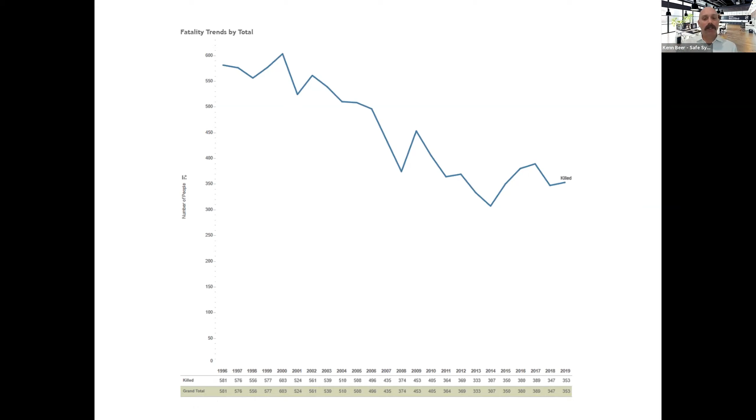So there's just a graph representing fatality trends in New South Wales since 1996. There's a general downward trend, which is pleasing to see, though it starts to flatten out a little in the later years. The numbers range from around 300 up to 600, sitting around 350-ish, dipping down there. But it's still a pretty big number. You have a large population, but these numbers are quite large.

Serious injuries are often something that people don't have front of mind when thinking about road safety. Fatalities get the headlines and are reported, but serious injuries are often the ones that last a lifetime, lifelong care, acquired brain injuries, quadriplegia, paraplegia - quite a spectrum of what can be in the serious injuries. The serious injury definition is really about admission to hospital, so that means you can have some lesser severity injuries where people recover, maybe with some physiotherapy, and are able to lead a normal, healthy life. But there are quite some very serious incidents within this.

There are categorizations of serious injury, so you can go into more detail, and the Centre for Road Safety does that sort of work to gather understanding. But the magnitude we're talking here is 4,000, 5,000, 6,000, up to 5,500 - huge numbers of serious injury, which sort of bubbles away under the surface of those fatalities. That is a major health crisis really going on in New South Wales. It's a challenge because it's been ticking away for all of our lives, really.

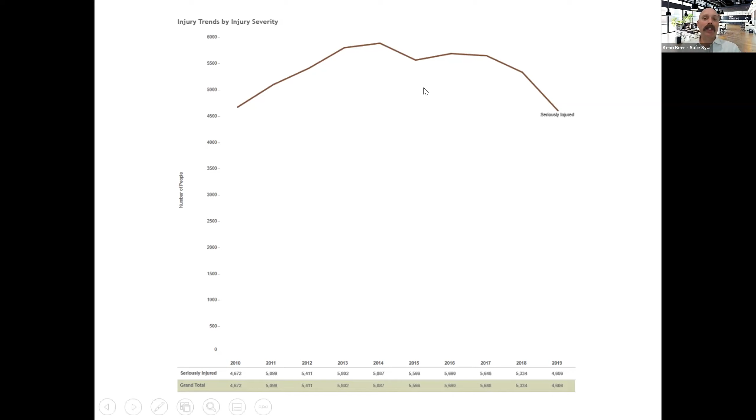And the fatalities and serious injuries just keep happening, run of the mill. So getting huge traction to change that can be very challenging. But there is a good bit of work going on. Now you see the serious injury trend starting to come down, which is very promising, and we hope to continue that downward trend.

If you break things up by metropolitan, country, or regional - I'm using exact terminology that came out of a Transport for New South Wales report - you can have a look here, we're doing fatal and serious injury combined, and we've got the crash types.

You see there off path or out of control on straight, we've got the regional, country, and metro a little bit less. Off path or out of control on curve is the largest there in country areas and the largest of any of these bars. Then we've got pedestrians, metropolitan area obviously a large segment there, and not as many in country areas, but still certainly there.

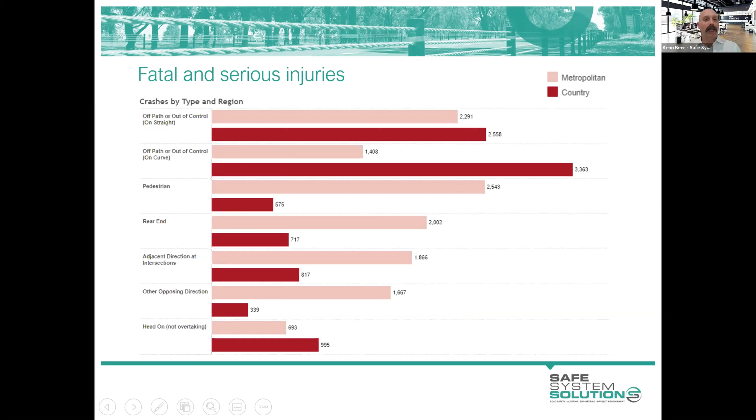Rear ends coming in, again metro more than country areas. Then we've got some intersections, and again metro areas are producing more crashes there, more fatal serious injury crashes, as you might expect. Other opposing directions, another intersection category. And then we've got head-on, not overtaking - so there's not an intentional overtaking maneuver in the head-on, but the head-on crash has occurred. So that's the overall trend in fatal and serious injury crashes.

If I use the fatals as an indicator of severity - so yes we had serious injuries and fatalities, but the most serious and damaging being the fatalities - this is probably a good indicator also of your highest levels of serious injuries. You see that country New South Wales or regional New South Wales starts to pop out as a dominant area of this.

Now there are a number of factors that mean we see country pop out very high in these categories. What would that be? The first person to put probably the most dominant factor into the Q&A can win a prize. So Wade has jumped in there very quickly with speed, and speed is absolutely the dominant factor in terms of the severity of crashes.

Now there are many other factors, and I noticed fatigue popped in there as one. So certainly, yes, people are having long distances and they're getting tired and leaving the road, and those are causal factors, absolutely. The speed creates the severity of these crashes, and why we see the fatal end popping out higher, and the higher level serious injuries as well.

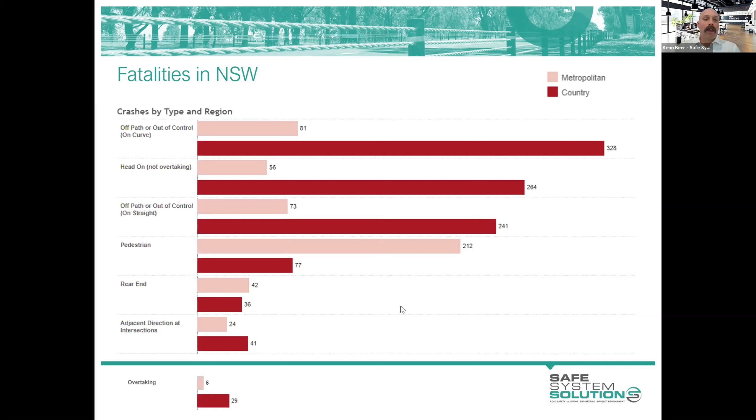If we look there, and I just grabbed a few others, you see it starts to really kick up with the USA at about double in terms of per head of population. The US will always argue that it should be measured by vehicle kilometers traveled because they travel more than anybody else, they say. But even when you cut it down by that, they don't perform that well either.

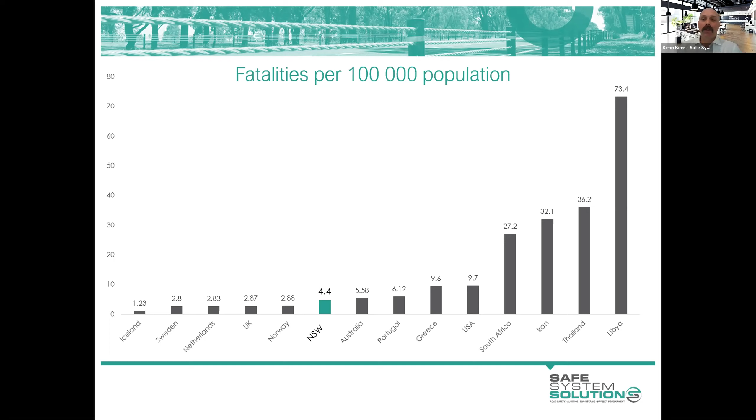And it'll happen again next year, and the year after, and the year after, and it'll just continue to roll. It's a huge, huge issue, and we've got to look for ways that we can address this, as we've been doing.

But certainly in New South Wales, one of the biggest and most violent and most severe crash types you're seeing on your roads and roadsides is where vehicles leave the road and hit point source hazards, be that a tree or a power pole. Now these crashes are happening at speeds that are unsurvivable for the occupants of the vehicles, even in the best vehicles available to us.

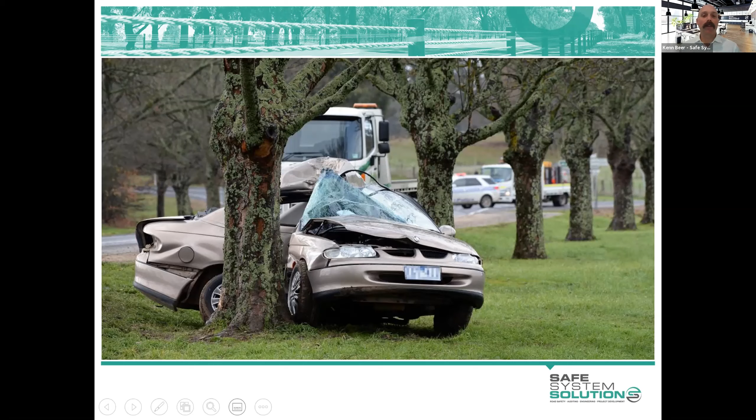The energy transferred to the occupants of the vehicle when they strike power poles or trees - you cannot survive that. Your body is not designed to survive that, and the vehicle is not strong enough or not designed well enough to protect you at those speeds.

Even head-on crashes, while they are often less severe at more speed - you can crash at higher speeds because of the crumple zones, the airbags, the seat belts - in that frontal impact, we still see quite a large amount of death and serious injury from head-on crashes.

Now that picture might be a little misleading in terms of it looking very front to front. We often see quite an offset in these crashes, which actually makes it even more severe if you're only hitting half of the vehicle you're head-on crashing with.

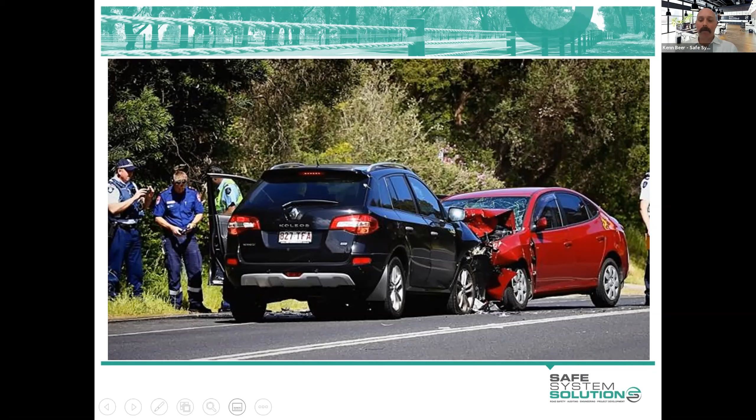Interestingly, we do also see quite a number of especially serious injuries with lane departure rollover crashes. They have maybe struck something small in the roadside, or maybe been yawing, which is where a vehicle starts to slide. They've maybe tried to get back on the road and slid to the side, their tires have collected some dirt and pushed the dirt around, and they've started to roll.

This is not as severe as that point source tree or power pole strike or the head-on, but we certainly do see quite a bit of spinal injury associated with these rollover style crashes. So we've got these cleared areas on the roadside, yet we're still seeing serious injuries occurring. Admittedly, there are quite a few people who will leave their lane into a roadside, and if it's cleared, will recover and not be involved in an incident. We need to factor these sorts of things into how we manage and design roadsides, and Jamie's going to delve into that in a lot more detail.

Even things like cuttings - in the past we used to think of a cutting as almost like a barrier in its own right and ignore it. But we do see vehicles snagging on cuttings, vehicles riding up them and rolling. Again, we see serious injury and sometimes death presenting itself from cuts. And of course, fill batters, the slope, and the ability to roll and draw you into other hazards is something of big concern.

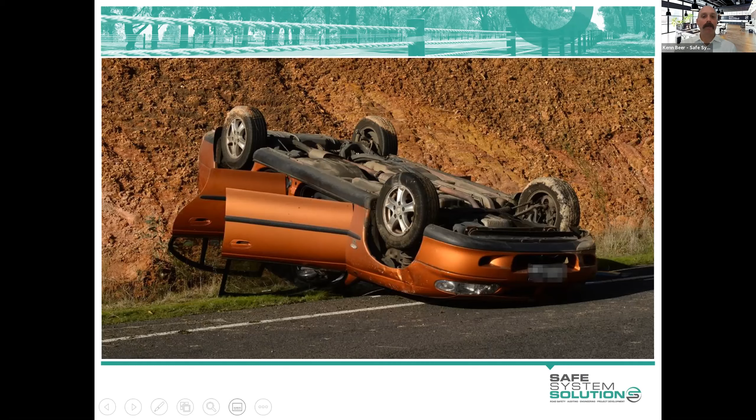Now, the New South Wales government is trying to address this through a number of mechanisms, and there's a Road Safety Plan 2021, and no coincidence really that there's a barrier on that plan, because barriers are going to make up a huge component of the effort to reduce road trauma in New South Wales. Barriers of different forms put in different places will do that. And the reason is that they align very well with the SAFE system, which I'll come back to shortly.

There's a couple of key documents, and Jamie's going to take you through these. Austroads has recently released the Guide to Road Design Part 6, Roadside Design, Safety and Barriers - that's the updated version, it came out very recently. So those who have been operating under older versions and have their way of operating pretty well set, because it hasn't changed that much in quite a long time - there's been some pretty big changes, and Jamie's going to give you insights into those.

We also have the Manual for Assessing Safety Hardware, or MASH, which is the AASHTO document - an American document - but that is about the test protocol for barriers. So what do barriers need to be, how do you test them, and which ones do you accept in terms of passing these tests? That manual is a very comprehensive document telling you exactly how they need to be tested, what weight of vehicle, speeds, angles, what sort of results you need to get, how you need to set the whole thing up, and all of that.

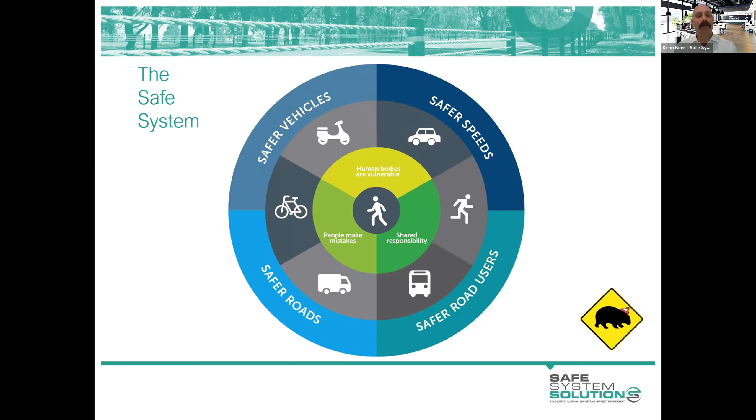But the real takeaway is that barriers are proving to be an amazing road safety infrastructure feature. They align highly with the safe system, which the New South Wales government has committed to and is implementing. There's a huge amount of money being pumped into barrier rollout, and we need to get it right. So this course is really about setting you the fundamentals of making sure we get the most out of every dollar spent on barriers in terms of lives saved and serious injuries prevented, giving you that base level understanding.

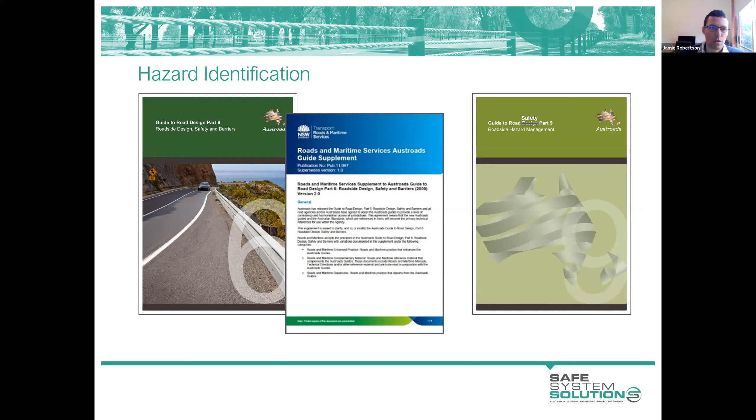There's also the Guide to Road Safety Part 9 around roadside hazard management. Now that's quite an outdated document dating back to 2007 or 8, but it is a useful resource when it comes to looking at hazards in the roadside.

So the updated guide really has changed things up a bit when it comes to assessing hazards, and it's hopefully making it easier for practitioners and a little less subjective than was previously the case. It's grouped hazards into a few different categories. The most significant of those hazards fall into the significant hazards category.

Now, hazards are grouped based on what's referred to as a trauma index. These are the ones with the highest trauma indices, and they have a trauma index basically equivalent to that of striking a tree in the roadside. So significant hazards include trees and other fixed objects that are rigid and will bring a vehicle to an abrupt stop, utility poles, of course, signal poles, rigid lighting poles and the like.

It gives some criteria around batters, which are sort of typically subjective to assess in terms of their risk. So some guidance around fill batter heights and slopes, and also for cut batters. Watercourses of a sufficient depth to submerge a vehicle and therefore create a drowning risk as well. Drainage structures appear in the significant hazards list. So these are the worst hazards that we encounter on our roadsides.

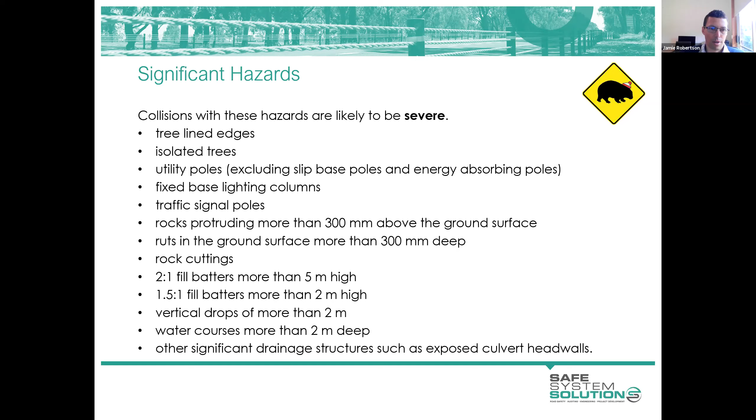There's the number one killer on our roadsides, trees, and it's particularly the case that we see these fatal and serious outcomes where there's a side-on impact at speeds as little as 30 to 40 k's per hour, as Ken mentioned.

And some studies have shown that on our roadsides, something in the order of 85 or 90% of serious and fatal crashes occur when a vehicle strikes a rigid object. So there's 10 or 15% left over, which are your rollover type crashes and perhaps a really violent yaw event. But most of the time we're hitting a rigid object, and most of the time, something like two-thirds of the time, that object is a tree or a utility pole.

Now we have a little definition for what constitutes a hazard when we're dealing with trees, and anything greater than 100 mil in diameter is typically considered non-frangible and therefore a hazard. And that would apply to any timber, pole or object in the roadside, I would suggest.

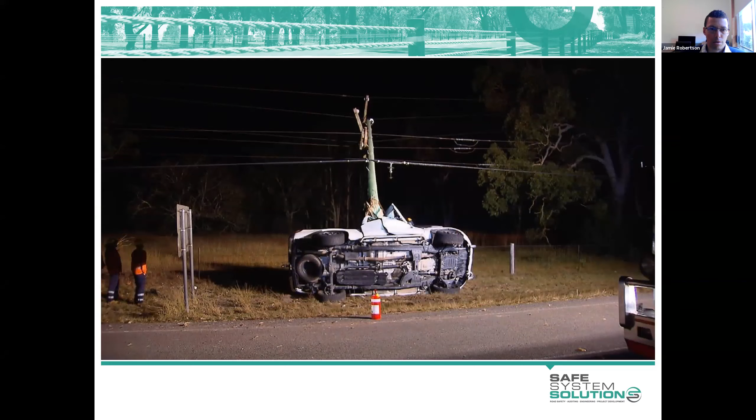Utility poles, basically identical to a tree in terms of the risks they present to errant motorists. And they're often located in some of the worst spots, the most difficult spots to treat them. Now, we all know how expensive it is to relocate power, and the desirable solution might be to relocate it underground, but that rarely happens. And even if it does, there might be some residual risk in the roadside related to other hazards or rollover risk. So it usually comes down to installing barriers to shield utility poles.

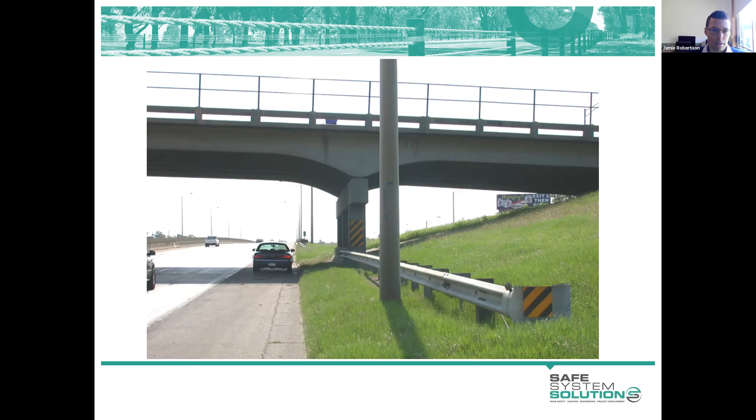So we should be locating any such roadside furniture behind barriers and well clear of barriers so that they allow the barrier to perform freely.

On another freeway near Melbourne, some interesting things happened when some of these structures were located a particularly long way from the roadside and with long outreaches. They started to topple over towards the road, which created a lot of issues. And we are now locating these closer than ever, perhaps, from the roadside, because we've gone away from that clear zone thinking and we're shielding all of these things with barriers.

Going forward, we're seeing a lot of high containment barriers installed about these pieces of infrastructure to prevent, in particular, the situation where a truck strikes them and there's a potential for a secondary event where the structure falls over the roadway and leads to further collisions. So you would expect to see perhaps a thrie-beam barrier or a concrete barrier installed at a structure like this, depending on the number of heavy vehicles, the volumes, the risk that's been assessed for that particular location.

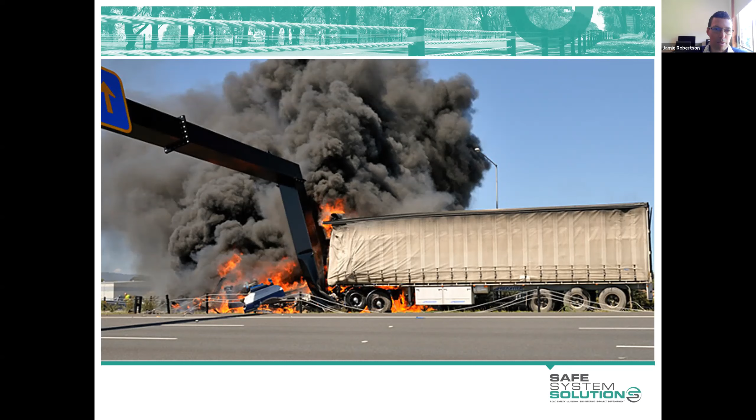There's a range of drainage structures along our roadsides that present a risk to errant motorists. We often have culverts at driveways and side roads located parallel to the road. The head walls installed on these culverts present significant hazards. They're typically located in table drains, which are likely to capture and direct that vehicle towards the structure. The easy fix would be to replace that concrete end wall with a drivable type and eliminate the hazard, rather than install a barrier, or perhaps install a barrier as well to address other hazards.

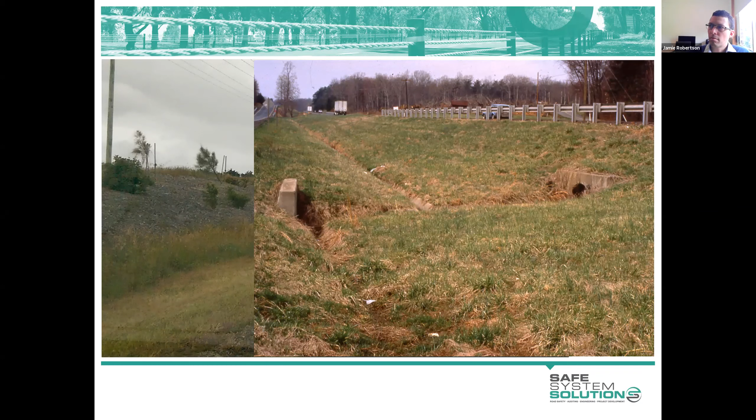Small structures such as this one can be quite subjective to assess in terms of the risk they present. The drop here is not great, probably less than that 2 metres we saw in that list of significant hazards. The decision on this project was to install a barrier on this structure, and for some distance either side, to shield the non-drivable batters.

Where we're dealing with structures, we need to identify them as hazards early in the barrier design process, because it can be quite a costly and time-consuming exercise to design and install a barrier on something like this. There's limited depth for posts, so we're typically looking at bolt-down post arrangements that might require a structurally designed concrete footing, or a ground beam with a pile at either side. So I stress to you, be mindful of structures and start thinking early on how these hazards are to be addressed.

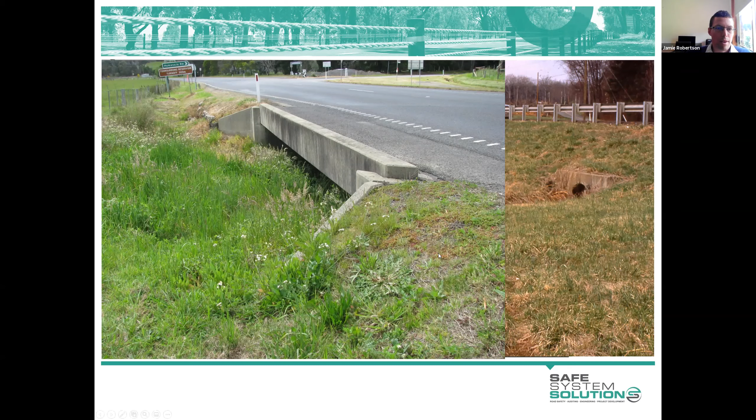Fill batters can be hazards or not, and there is some guidance in the updated Guide to Road Design Part 6 around this, which differs somewhat from previous guidance. We talk about recoverable batters, drivable batters, and traversable batters. The particular change I want to point out concerns fill slopes, sloping down from the edge of the road. Previously, slopes with grades between 3:1 and 4:1 were considered traversable and therefore non-hazardous. The change is that any slope steeper than 4:1 is now considered a hazard in its own right, as stated in Guide to Road Design Part 6. This somewhat contradicts other guidance in the Austroads suite, such as Part 3, which still refers to 3:1 batters as traversable.

Flatter batters, such as 6:1, are desirable because they're considered recoverable, meaning an errant vehicle that passes onto that batter, if the driver is alert enough, should be able to recover the vehicle and steer it back towards the road. Any fill batter, however, is likely to cause a vehicle to travel further from the road than it otherwise would. So hazards that may seem a long way from the road may be a greater hazard than you'd expect.

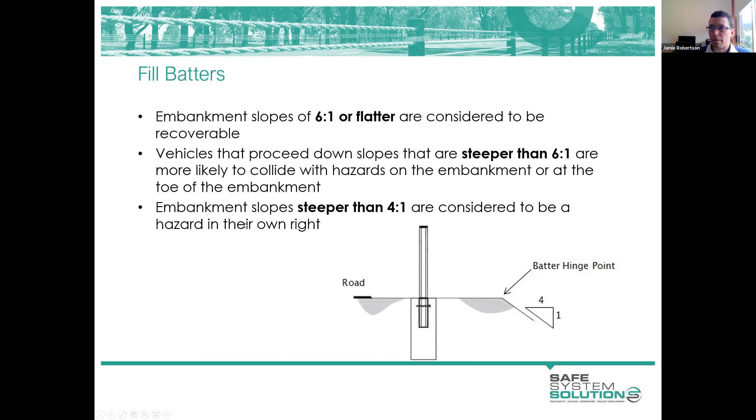Cut batters, as Ken mentioned, there's a school of thought that a nice smooth cut batter is effectively the same as a rigid barrier and will contain and redirect a vehicle in a relatively safe way. They are a subjective thing to assess, particularly where we have uneven surfaces that a cut batter presents a hazard. There is that rollover risk associated with a vehicle travelling up a cut batter and rolling over.

Where we're in cut, we're often in highly constrained environments. We don't have the luxury of a wide verge to install a barrier and provide deflection space between the barrier and the cut for a good and desirable shoulder width. There are lots of reasons why it can be undesirable to install a barrier in a cut situation. But on our high speed, high volume roads that are increasingly being retrofit with continuous barriers, the decision is generally made to install continuous barriers in front of cut batters, resulting in an improved safety outcome than leaving the batter exposed.

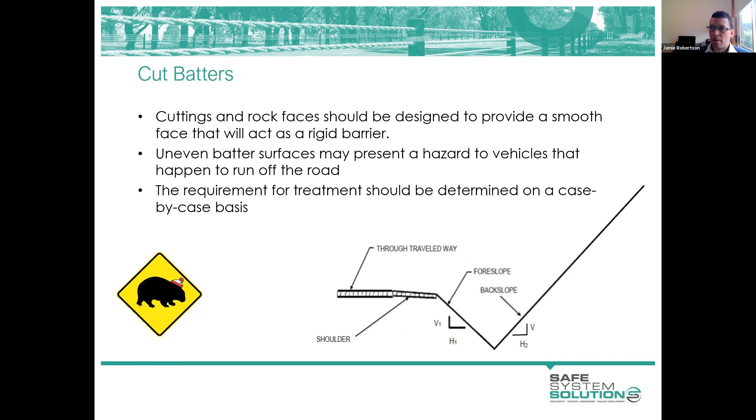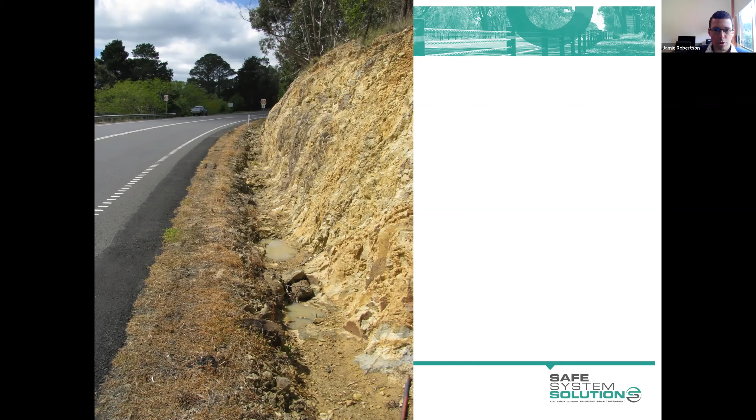Of course, the Rolls-Royce treatment might be to cut the batter back further, create a nice wide verge and install a barrier, if we consider this location particularly hazardous for other reasons. But in terms of assessing the cut batter in its own right as a risk, this one was relatively minor.

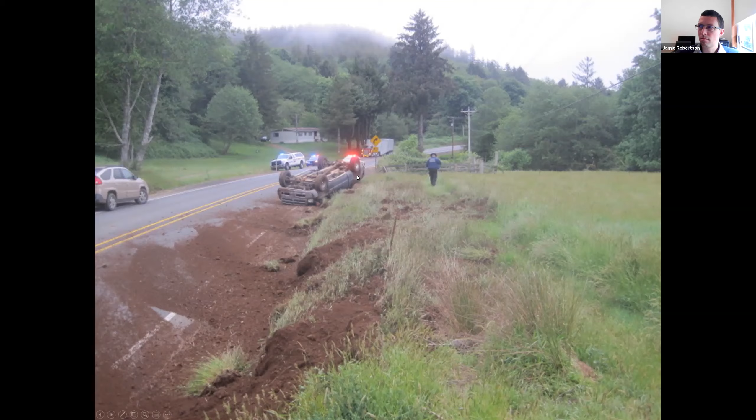Stepping down the list of seriousness of hazards, we have the category of less significant hazards. These are ones with a lesser trauma index than those in the significant hazard category. They're hazards that might result in an injury, but generally not a serious or fatal one. But of course, it depends again on impact speeds and angles.

So we have things like slip base or frangible poles, fill batters that are less severe, so lower and less steep than those in the significant category. Some hazards, such as rocks protruding a little above the ground surface, that would cause a vehicle and the occupants some significant discomfort, but not cause the vehicle to stop abruptly. Watercourses that are relatively shallow. What else have we got? Fill batters and so on. So these are the less significant hazards.

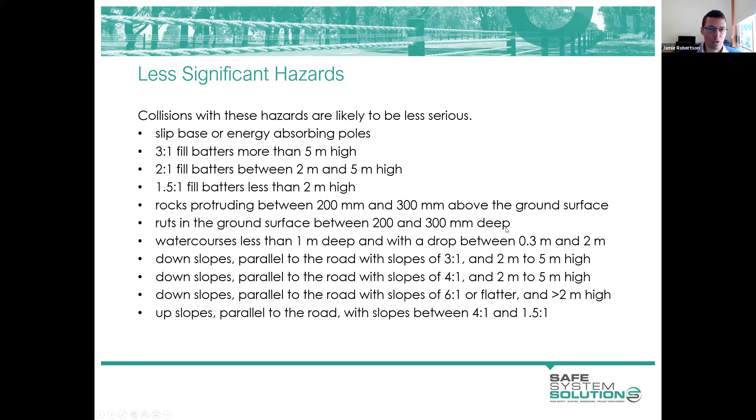Within that category of less significant hazard, we have the subset that is referred to as minor hazards. So these are some less severe fill batters again, some shallow watercourses, and so on. Now, it's important to note that impacts with any of these hazards, including minor hazards, are expected to be more severe than impacts with safety barriers.

Now, this again is a significant shift from the philosophy that was adopted in the previous edition of the guide, which essentially said that a safety barrier should be considered a hazard in its own right, and that you should explore other options such as eliminating hazards, lessening hazards before you consider installing a safety barrier. The improvements in technology and barrier system technology that have happened in recent years have seen them become much safer, to the point where installing a safety barrier at the roadside will rarely result in a worse safety outcome.

Now, we do need to be careful about certain things in terms of design, how we go about designing these things: lateral offsets, locating terminals, which are the most hazardous part of barriers, in locations where they're least likely to be struck, and so on. And we'll talk more about those sort of things a little later in the week.

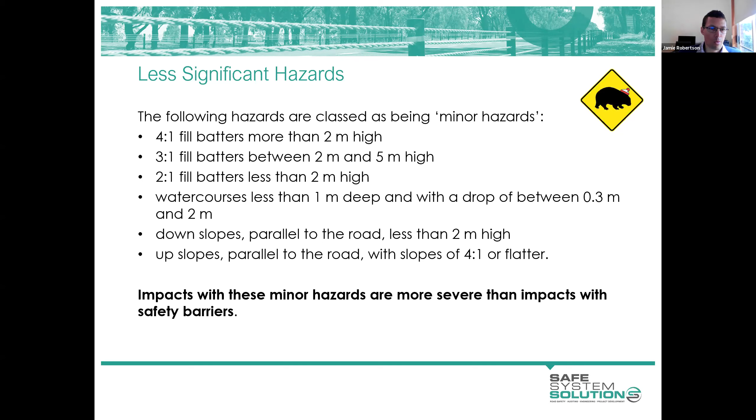So all of these hazards, the three categories that we've just discussed, appear in a table form in the guide, which is probably an easier way to compare the different types of hazards within those categories. So if you're thinking fill batters, you've got a particular fill batter slope and height. Which category does it fall into?

Look to this table. Jamie, just before we finish off with cut batters, there's a question that's come in. Jamie, do you have any examples of a batter on the back of a curb where a barrier was installed with non-standard deflection, and the reasons for why the barrier was installed?

Yeah, look, that has happened on numerous occasions on highways and freeways in Victoria, certainly. And it's often the case that post spacings are reduced and every effort is made to limit the deflection of the system. But even still, it has been accepted on occasion that some of the expected deflection will occur within that cut slope area. And it's usually the case that only a small amount of that deflection will extend onto the cut batter, perhaps a few hundred mil or something like that.

And if the cut batter slope is relatively gentle, perhaps 4 to 1 or something like that, I think the potential for an adverse safety outcome is pretty minimal. You need to be choosing your barrier system to limit its deflection and reducing post spacings to do the best that you can in those situations. Often the alternative is to undertake a huge amount of earthworks to gain a little bit more space.

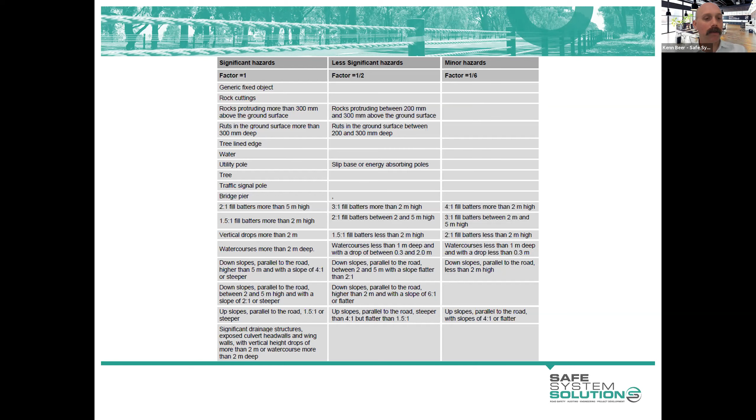Cut batters really are an interesting case where you have a cut batter. You typically have a curb, so that's in the mix as well, and you really do have limited space. So you need to do some careful thinking as to how you go about your barrier design.

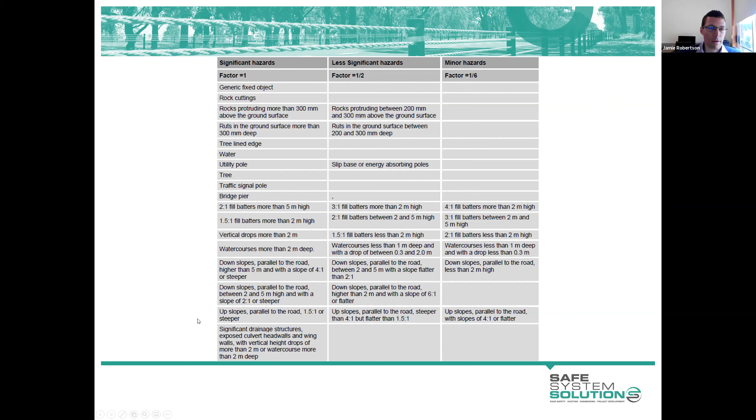Hazards for motorcyclists and other vulnerable road users. I won't go into motorcyclists too much because Ken will talk to this in detail later in the week. But in a nutshell, some smaller diameter hazards that are not considered hazardous to motor vehicles certainly are to motorcyclists. So we're talking our standard sign supports, 50mm nominal bore poles for instance. What are considered frangible light poles are certainly not frangible for motorcyclists.

Trees with diameters less than 100mm - lots of things that are hazardous to motorcyclists that we just don't think of when we've got the blinkers on and are thinking cars and heavy vehicles. Locating these objects where they're least likely to be struck by motorcyclists is hugely important.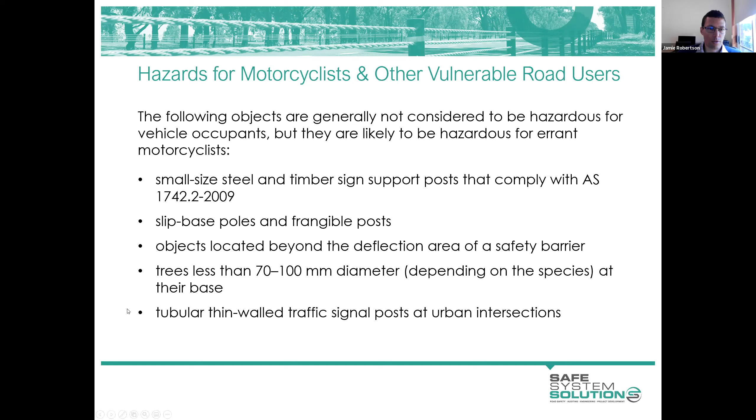Lateral distance to hazards. Previously it's all been about clear zones, and I'm sure you've all heard that term. The clear zone was that nice clear area next to the road that we like to provide to reduce the likelihood of an errant vehicle striking a hazard. The typical clear zone in a high-speed environment was something in the order of 9 metres. We perhaps extended that up to 15 or thereabouts on high-speed, high-volume roads. In lower-speed environments, it might be as little as 3, something like that.

The recent release of Part 6 has done away with clear zones essentially, or it's certainly recategorised them as what we refer to as a supporting treatment in safe system language. So a supporting treatment is one that reduces the likelihood of something happening, but certainly doesn't eliminate it. So clear zones fall into that category.

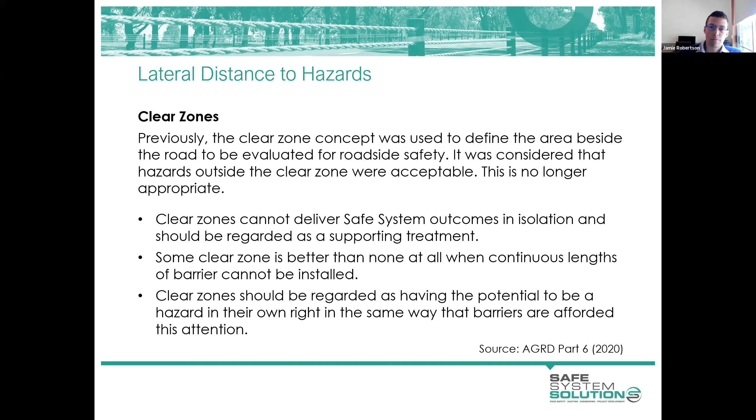When we have vehicles yawing, roadsides that look nice and smooth and safe still do cause vehicles to roll. So that is certainly one of the key reasons why we're not thinking clear zones anymore. The other is that we know that vehicles travel well beyond the previously adopted widths. Clear zone widths were based on some really old research in the States dating back to the 60s, I believe.

And they involved measurements of wheel tracks, errant vehicle wheel tracks in snow. So when you think about the changes in the vehicle fleet and the difference in conditions that we encounter in Australia compared to the origins of clear zone thinking, they really don't stack up anymore.

Some more recent research has been undertaken, and actually quite a number of pieces of research have been undertaken around what sort of clear area would we like to provide or need to provide adjacent to our roads to achieve a safe system outcome, to avoid vehicles travelling beyond the old clear zones and striking hazards.

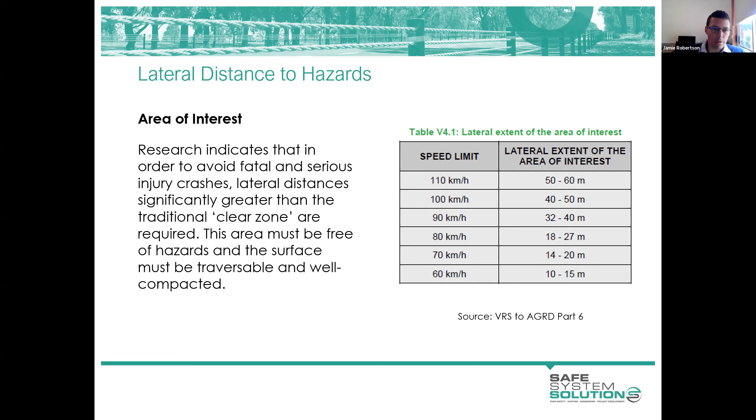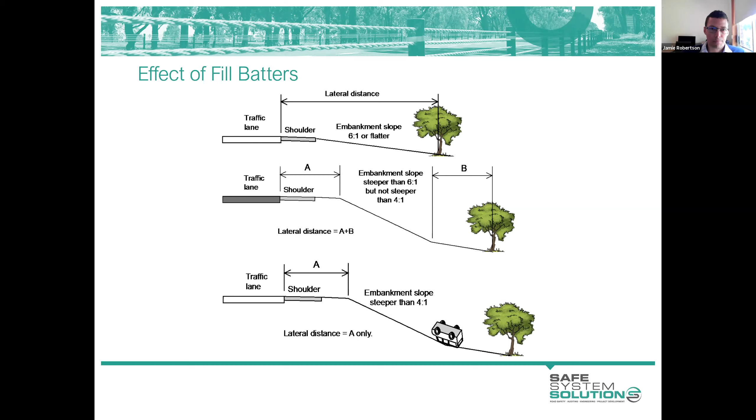One of the key additions to the new Part 6 is a risk assessment process for assessing roadside risk. This basically replaces the old clear zone thinking. Obviously, it takes into account the offset of hazards from the edge of the road, so there's an element of clear zones in there, but it considers a number of other risk factors.

It uses this fairly typical risk assessment process, considering exposure, likelihood, and severity of impacts. I won't go into a lot of detail, but I encourage you to look at the new guide. When it was released, Austroads put out two webinars to explain this process in particular. I assume they're still available at the Austroads website, and I encourage you to look at those, particularly the first of the two. The second is more about the background research that went into developing this process. I'd like to give you a bit of a snapshot, but I encourage you to also look at the webinar at the Austroads website.

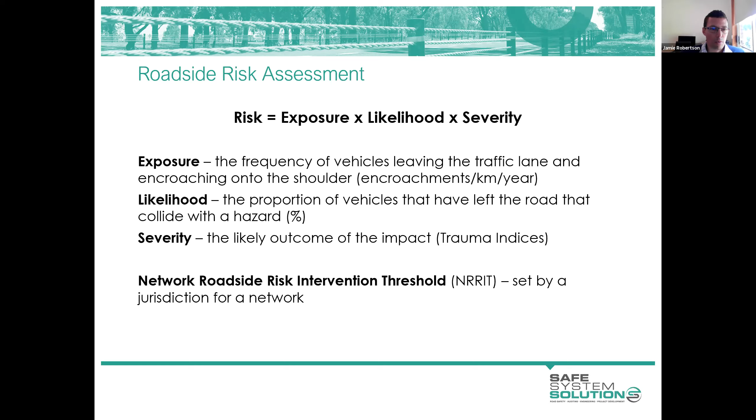It has this risk assessment methodology, and it uses this term 'network roadside risk intervention threshold,' a bit of a mouthful. Basically, that NRRIT sets a level at which we might want to intervene and take steps such as installing safety barriers. Each jurisdiction is currently doing some work to come up with guidance around this, and at what level we might entertain taking certain steps.

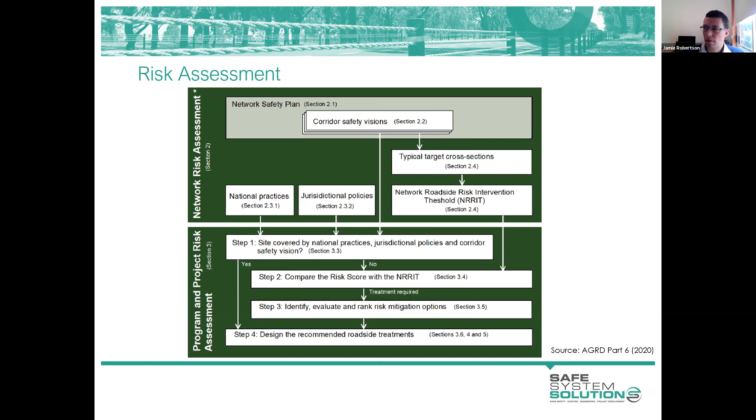There's the risk assessment process in diagrammatic form. We're really talking about the bottom part of this process, which is about coming up with a risk score for your particular section of road, comparing that score with an NRRIT determined by the relevant road authority, thinking about treatment options, prioritising the highest risk sites, and then implementing those treatments.

The guide talks about hazards being background or isolated hazards, and it's often the case on a particular piece of road that we have both. The background hazards are consistent and continuous. It might be a continuous row of trees, it might be a batter, it might be a cut batter, or perhaps the hinge point to a non-drivable fill batter. It might be the fence at the property boundary, or it might even be your clear roadside, which has its own inherent risk.

There are typically also isolated hazards within the roadside - the occasional tree, pole, other rigid object, watercourse, or whatever it might be. So hazards located fairly close together are your background hazards. The assumption is that a vehicle that manages to pierce through those isolated hazards will strike or reach the background hazard. So keep those two terms in mind.

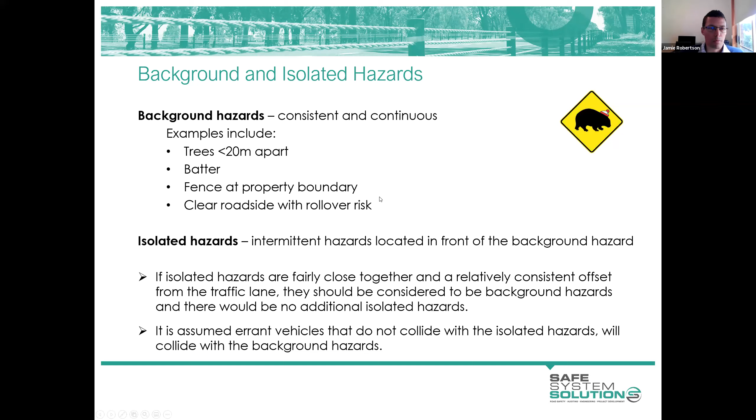The guide provides a series of charts, something in the order of 20 or 30 of these. There's a different chart for each combination of rural or urban location and terrain type, whether mountainous, rolling, or flat, and for different operating speeds: 70, 90, and 110 kilometers per hour. So lots of different charts, and you need to locate the one that best suits the site you're looking at.

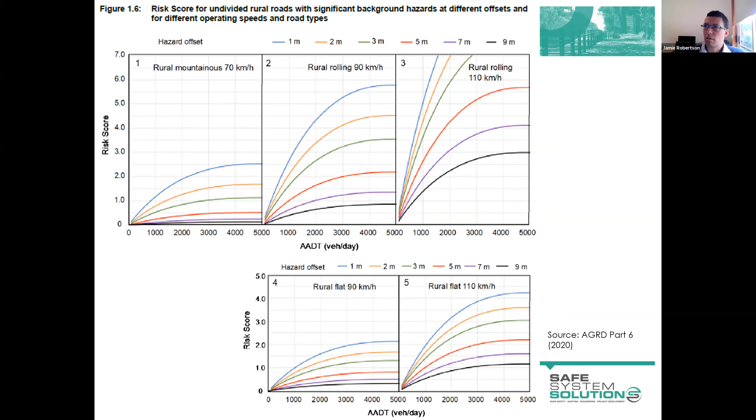Jamie? Yes. I'm sorry, Jamie. A question's come in from Mark. G'day, Mark.

Have any other jurisdictions set NRRIT to target any of their program funding yet? In New South Wales, they're just starting to investigate, noting that the guidance is quite new. So none that I'm aware of, Mark. Vic Roads is fairly well progressed but have not published anything. Actually, great question for Evan Coulson tomorrow, he's heavily involved in that. He'll be able to tell you the status of the Vic Roads guidance, but none that I'm aware of have released anything yet. Yeah, no, that's the same as I was going to say.

I don't think anybody's quite there yet. There's a bit of work bubbling away in the background in a number of jurisdictions, but certainly these risk graphs can be useful for understanding relative risks and the like. So they're not useless if you don't have an NRRIT score or a threshold that you're working to. But yeah, it's something I think all jurisdictions are going to have to get their head around.

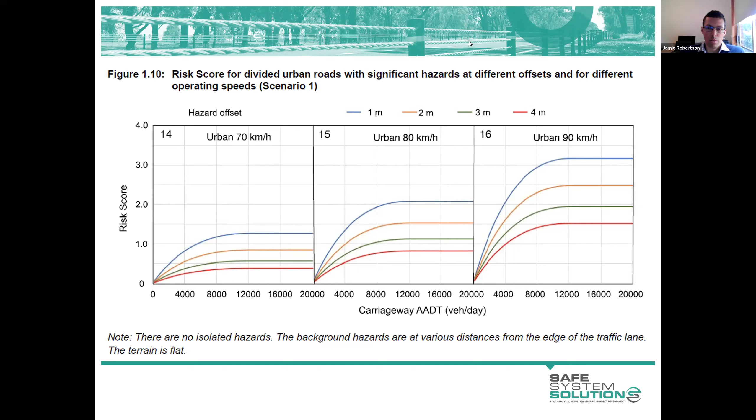I noticed another question coming from Wade, one that I've wrestled with many times. Wade's asked, has the change of thinking about clear zones affect the length of need of barriers, such as on the approach to a hazard like a watercourse? Where we're looking to shield a watercourse that continues a long way from the road it's crossing, we need to adopt a protected width to determine our length of need for our barrier. Commonly that width would have been our clear zone. It's a great question, one that I don't have a good answer for, I'm afraid.

We need to draw a line somewhere. You might base your barrier length on a clear zone, or perhaps the width to the property boundary, but you need to make a call on a width. So, good question.

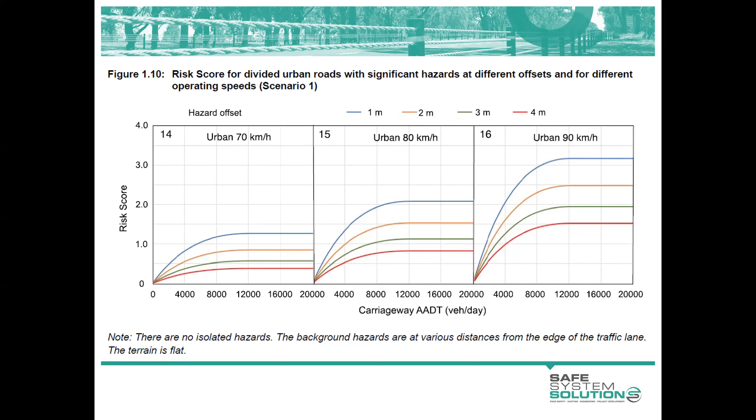So here we have some more charts from the guide. These are ones where there are no isolated hazards in an urban environment. You can see that the numbers on the vertical axis are less than we saw in the previous charts, because our speeds are lower essentially.

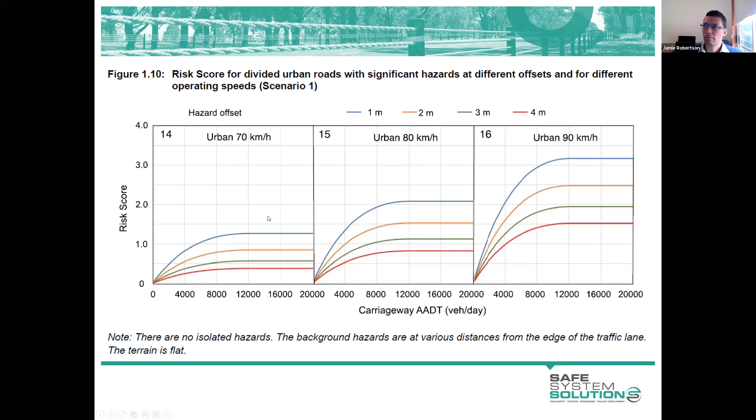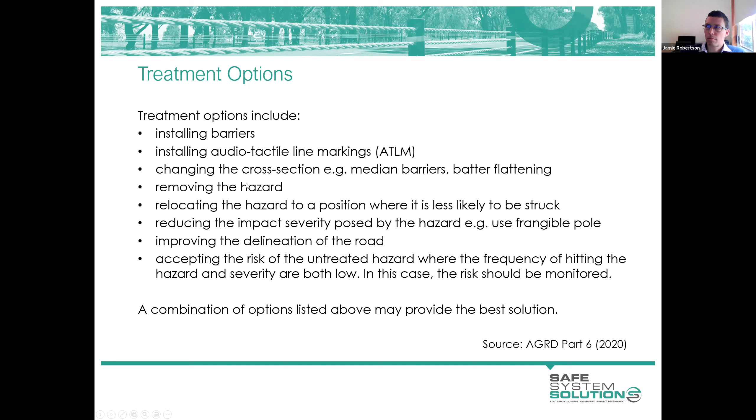Some more quotes from the guide: the primary method of mitigating risk due to vehicles leaving travel lanes is to install safety barriers.

That is certainly the case in high-speed environments. In lower speed environments, where our speeds are within those safe system thresholds of perhaps 70 and 50 kilometres per hour, depending on the crash type we're talking about, we wouldn't entertain putting barriers in, certainly in a 50-kilometre environment, for instance.

It does recognise that we need to consider the risk associated with installing a barrier, and that one should only be installed if it reduces that risk. But in most situations, the barrier will reduce that risk.

We need to recognise that a barrier will be struck more often than the hazard it's intended to shield, because that hazard is located further away. It is often the case that an errant motorist will be able to recover their vehicle and get back on the road before striking that hazard.

So barriers are subject to many nuisance impacts. Not every impact is a life-saving one. However, some of them are. And the vast majority of impacts with barriers result in little or no injury to the occupants of those errant vehicles, particularly when we're dealing with flexible barriers, which are our preference.

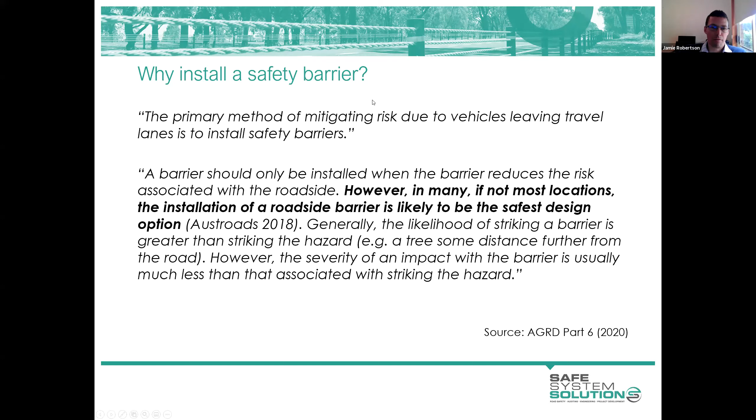As I mentioned, terminals of barriers are the most hazardous part, especially where we're dealing with barrier products that are no longer accepted for use, and often for good reason. We know that some of the older products, breakaway cable type terminals, present a spearing hazard to vehicles.

So these sort of systems should be replaced wherever possible, wherever funds permit, or wherever they're impacted on site. They should be replaced with a currently accepted impact absorbing type terminal.

We need to be mindful of where we locate terminals in particular. We don't want to locate them on the outside of curves, within curves, for instance, where we know that vehicles are prone to leaving the road. We should flare them away from the road, even by a small amount wherever possible, to minimise nuisance impacts.

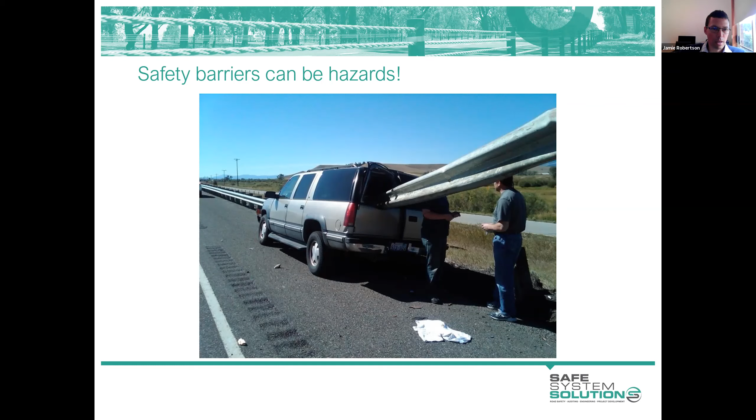A similar situation occurred recently, where the terminal, again a breakaway cable type terminal, fortunately in this case didn't spear the vehicle, but quite easily could have. Hopefully the occupant of that vehicle walked away. But these terminals, their entire length is ineffective in redirecting a vehicle, so there's that risk associated with the end-on impact and potential for spearing. They also provide a reduced effective length, so there's lots of reasons why the newer breed of products are better than these type of things.

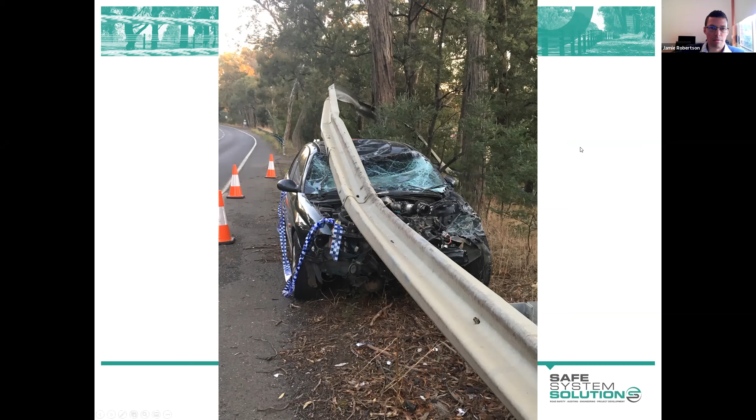Jamie, we'll just pause there for a question that's come in. Is there consideration for the increased risk to maintenance workers and broken down vehicles not being able to fully and safely pull off the road if the distance between edge line and barrier is 2.5 metres or less? I think you'll cover this a little bit on Wednesday, but any initial comments?

Yeah, absolutely. We'll talk about this in detail on Wednesday, but it is a significant consideration, for maintenance reasons and the safety of people that need to pull over at the roadside. There are desirable offsets that we like to provide to allow a vehicle to pull over clear of traffic. We'll discuss those. So the desirable thing is to allow a vehicle to pull over clear of traffic, open the door, change a tyre, all of these things.

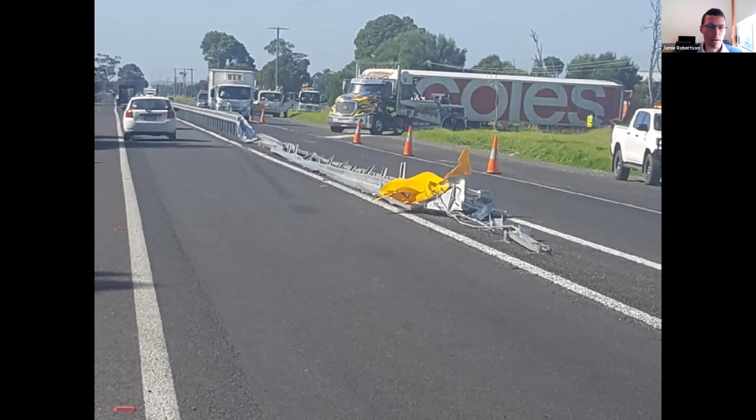Another location where a wire rope had just gone in and was still under traffic management with a reduced speed limit as well, but it was taken out, presumably by a truck, just based on the length of damage, which was huge. So the message is that these exposed median terminals need a particularly high level of delineation.

They do present a hazard, both from the initial impact, especially if it's a passenger vehicle or even a motorcycle - there is potential for injury. There's also that potential secondary consequence - there have been cases of trucks striking them and catching fire, with roads being obstructed and closed as a result of impacts.

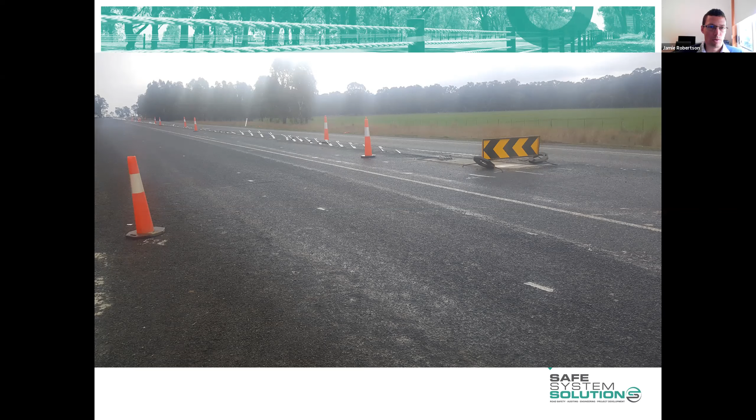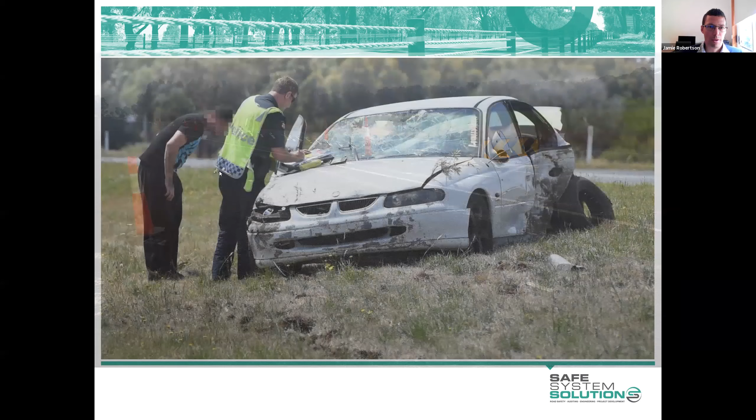So be mindful that what you might have considered a nice, safe roadside - a flat, clear zone next to the road - is not a roadside that meets safe system objectives. Rollover crashes can and do occur. Vehicles travel well beyond the clear zone lengths that we might have had in mind previously. And these roadsides present a risk.

On a high speed, high volume road, there is certainly a benefit in installing continuous barriers. It's certainly justifiable in terms of benefit cost analysis. And I encourage you not to think clear zones - refer to the new Part 6 for some updated guidance, which hopefully takes some of the subjectivity around assessing certain hazards. And stay tuned for some guidance from Transport for New South Wales around NRRTs. That's all from me, Ken.